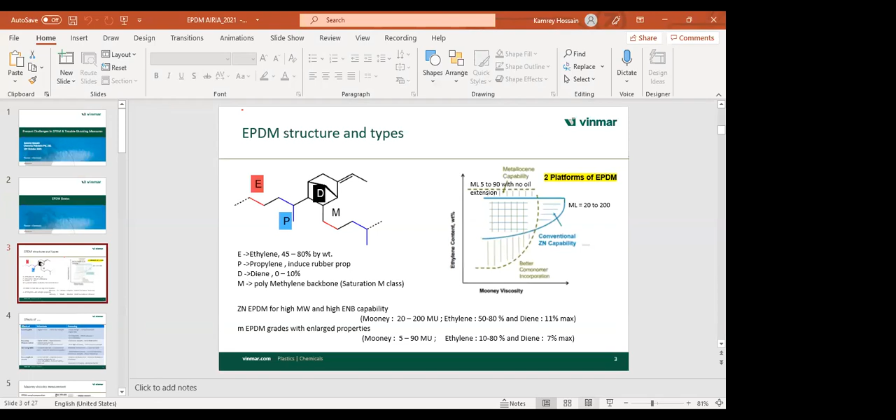Okay, now you can see the slides. Yeah, it's now coming, second slide is coming. So sorry, again I'll repeat. So my mistake, Vaibhav, you sit here. Yeah, sorry, so sorry, so let me start from the first again. Sorry, my apology.

So here I am showing about the EPDM structure and types of EPDM. If you see the EPDM structure, EPDM consists of ethylene, propylene, and diene. M stands for the saturation M class rubber, so M means polymethylene or methylene.

There are two platforms for making EPDM rubber. One is Ziegler-Natta catalyst system, another is metallocene capability. Mostly in the world, EPDM is manufactured using solution polymerization technology. Only Versalis is making EPDM through slurry mechanism technology, and Arlanxeo has one plant for the slurry technology. Arlanxeo also uses their own innovation technology that is called ACE. The rest of all the plants in the world are either using Ziegler-Natta or metallocene.

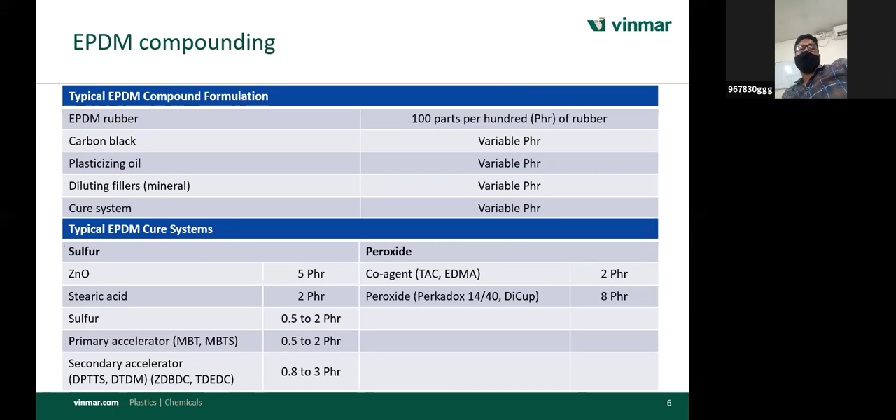This is the typical EPDM compounding. EPDM rubber, we take 100 parts, carbon blacks at variable PHR, plasticizing oil, diluting fillers mainly calcium carbonate and clay, and cure systems. There are two types of cure systems we use in EPDM — one is sulfur and another is peroxide.

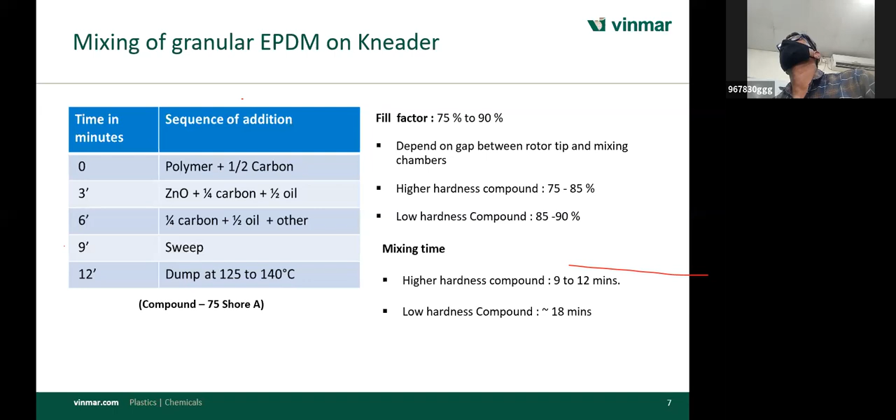Lot of noise is coming. I think somebody — can you please mute? All are requested to keep themselves on mute mode, please.

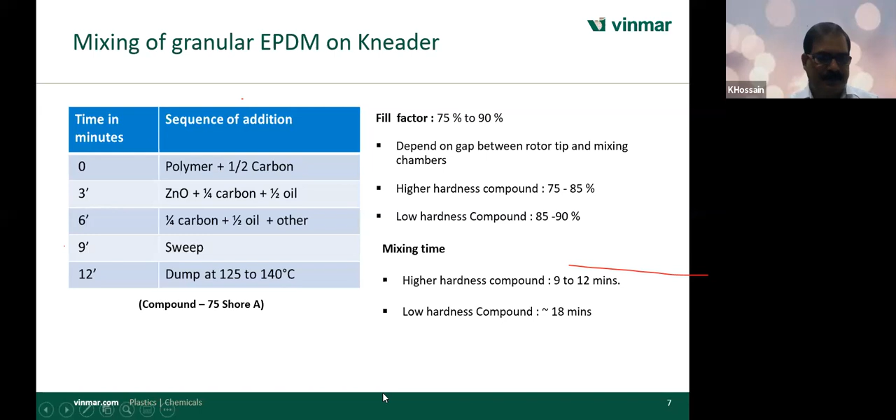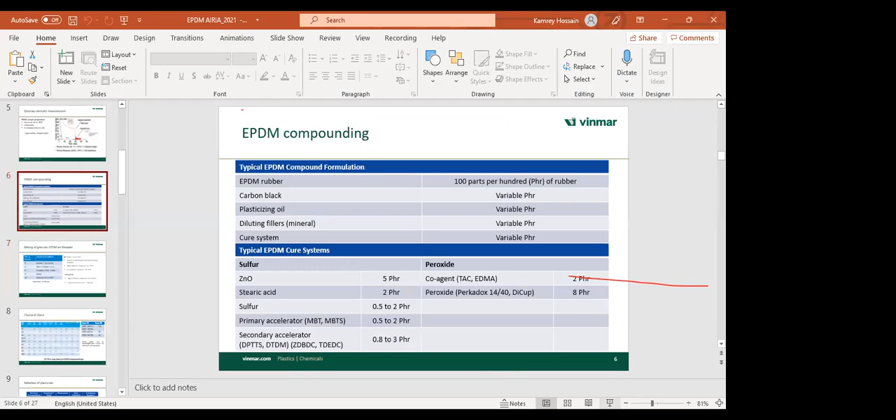Yes. Yes. Yeah, Mr. Dev.

So any questions on this slide?

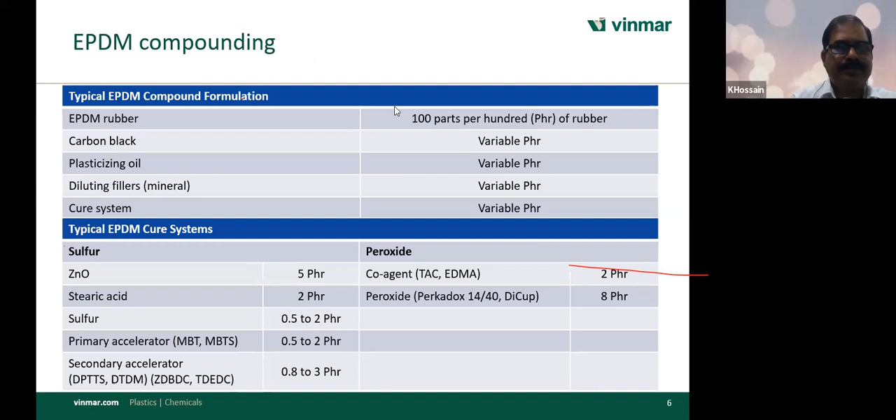I wanted the solubility limits basically for different accelerators. I think some of them are available this way.

Excuse me, I think we should finish up this presentation and you can do question and answers later on.

So please continue, no issues.

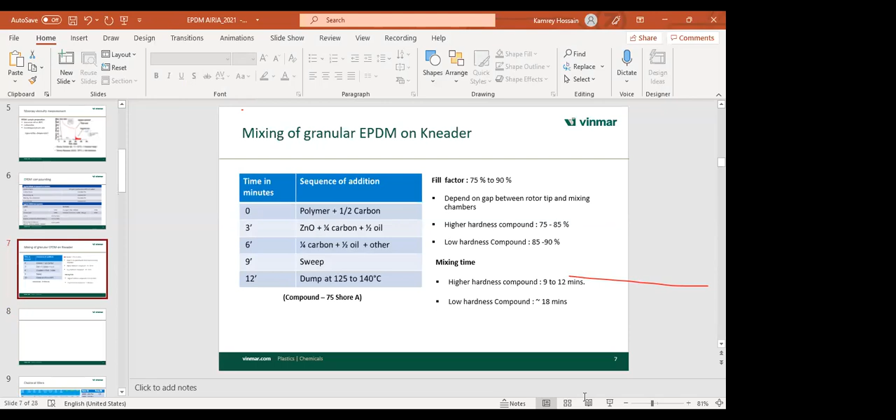You're on mute, we cannot hear you. Yeah.

It depends — the fill factor of the mixing of any synthetic rubber is important in case of a kneader. It depends on the gap between the rotor tip and mixing chamber. So if your kneader rotor is old, please take care of the loading.

Generally, the lower the hardness, you have to fill more. If the hardness is high, then the fill factor is less.

Again, mixing time depends — there is no standard mixing time for kneader mixing. It depends on the hardness of the compound. For high hardness, usually 9 to 12 minutes.

But for the low hardness, we recommend to mix...

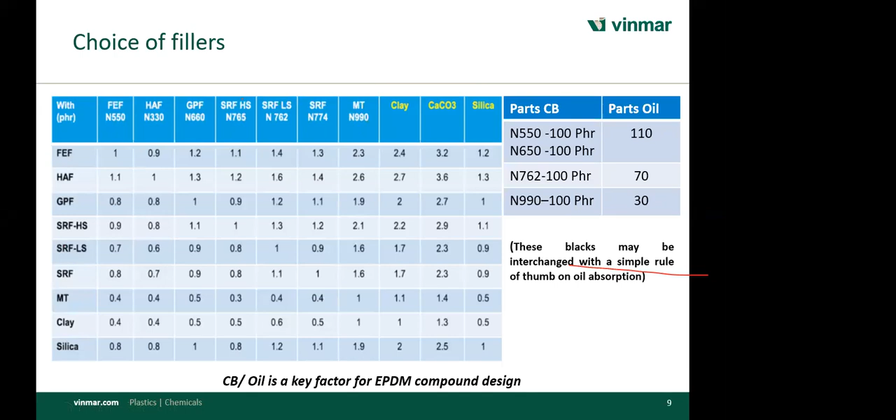Similarly, for SRF grade, we recommend 70 PHR, and for MT black, we recommend 30 PHR. So an important factor for the design of a compound is the carbon black versus oil ratio. That is a very, very important factor that I'll discuss in detail later on.

But if you go for high heat resistance and peroxide cure, then paraffinic oil is recommended. In paraffinic oil, there is low volatility. And if you go for the high temperature range, then we recommend high viscosity paraffinic oil. For higher service temperature, we recommend polymeric plasticizer, which is an ester type, like sebacic acid or soybean oil.

Now I'll discuss a little bit on the cure packs. In EPDM, we recommend conventional, semi-EV, and efficient vulcanization systems. The dose of sulfur is very important. In the conventional system, sulfur is 1.5 to 2.0, whereas in semi-EV it's 0.5 to 1, and in the EV system, maximum 0.5 PHR of sulfur.

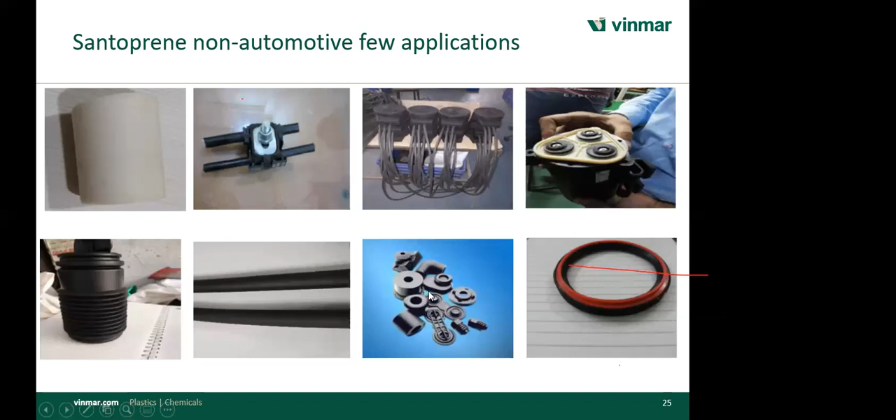A lot of synthetic rubber here. This is the CNG hose, fire hose. Earlier people used synthetic rubber; now it has converted to Santoprene. This is used for a lot of grommets, any type of things. And this is the SWR ring.

So this is all I wanted to share with you. I know a lot of questions may arise, so whatever knowledge I have, I can answer you. Otherwise, this forum has a lot of expertise; they can answer you, or later on we'll address it in a proper manner. Thank you all for your patience and listening.

Mr. Kamble, thank you for the presentation. And my name is Farooq. I have one question. After the product is finished, sometimes we find some rainbow effect on the surface, on the sheet. What could be the possible cause? That probably is blooming. It's a type of bleed. Oil is bleeding probably.

So what could be the possible cure for that if the oil is bleeding to the surface? If you can increase your PEG level. Polyethylene glycol is very good. Even in some cases sulfur blooms. We recommend first increasing polyethylene glycol, 2000 to 4000 molecular weight, at 2 to 3 phr. If your compound is more loaded, you need more phr; if less loaded, you need less phr. If that doesn't work, add some TDQ or TMQ, maximum 1 phr. TDQ or TMQ is a normal antioxidant; they prevent these type of chemicals from coming out of the surface. They form a complex and bind it inside the surface. And third, if the problem still remains, you go for insoluble sulfur, which is costly.

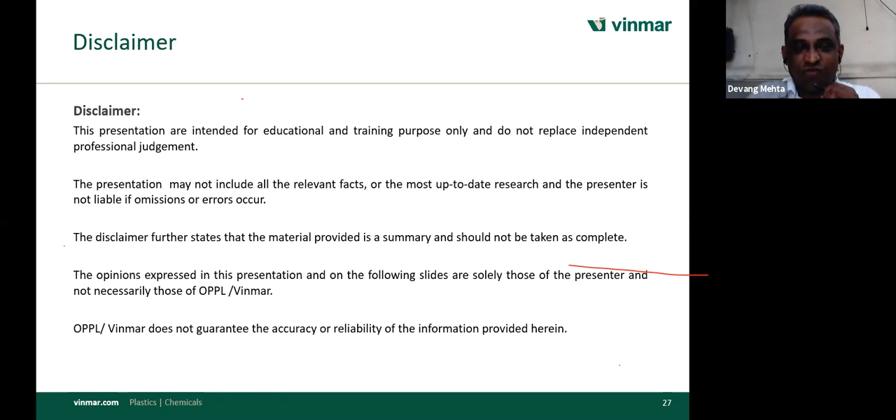Thank you. Sir, am I audible? Yes, Devang. Sir, we have three questions. First, in type B, you have mentioned calcium oxide dosage as high as 4 phr. In normal formulation, it is 1 to 3 phr. So why so high a dose? Second question was compared with TPR and EPDM, can we load more fillers in TPR and submit it? That was my second question.

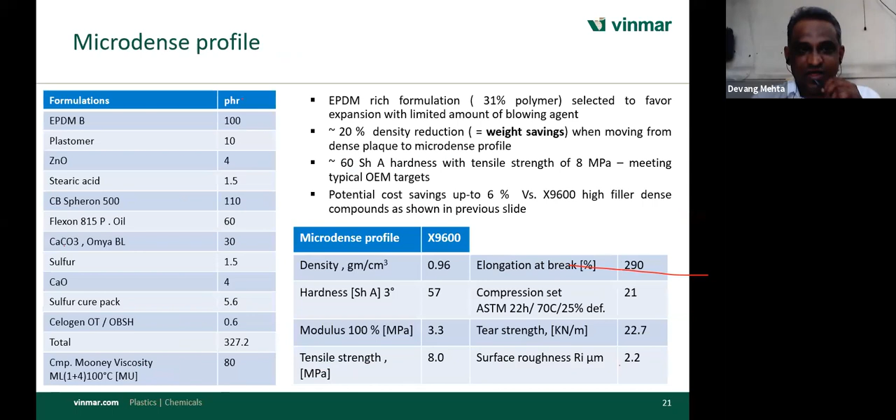Yes. So can you repeat your first question? I'll go to that slide. Sir, in type B, you have given a calcium oxide dose of 4 phr. Previous one, sir, Type B.

Okay, yes sir, this slide.

Why so high dose of calcium oxide? This is for the microwave curing system. In microwave, that is pressureless curing, we recommend high doses of calcium oxide. If pressure is there, like normal molding, compression or injection molding, you don't need to use calcium oxide.

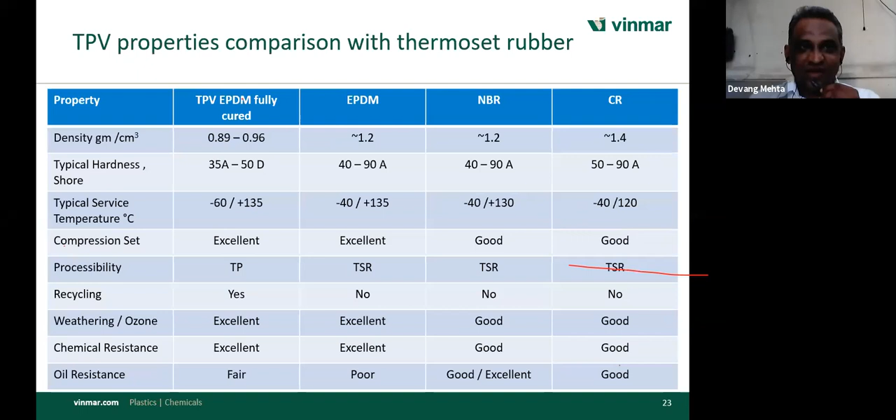My second question was about filler loading in TPR, can you highlight on it? No sir, you cannot add any filler with TPV, nothing. As far as I know TPV, I cannot comment on TPR. I don't have any knowledge on TPR or TPE, but Santoprene, you cannot tamper.

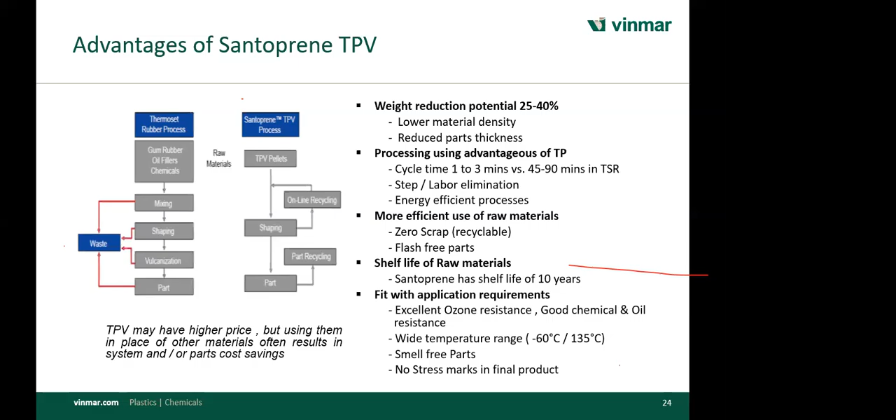Next question: how to increase the tear strength of EPDM compound? You have to reduce your mineral fillers. Still, if not getting satisfactory result, go for high molecular weight EPDM. Going back to my first slide, if you switch over to the Ziegler-Natta system of EPDM, like oil extended EPDM, you will get excellent tear. So if your molecule is high, then you cannot break it down.

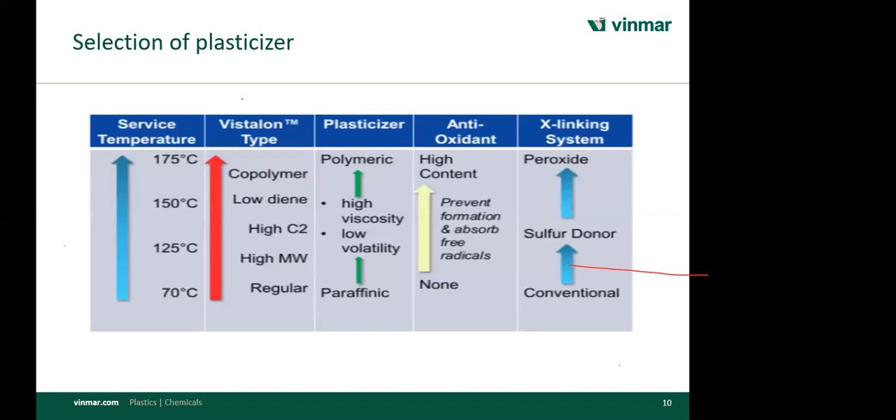or EV system. If you want to move on, again 175 degree centigrade, your product is going to sustain for long term duration in use, then you have to choose the peroxide system. And in peroxide, please remember, don't use HVA2, since most cases I found people mixing up. Once you buy peroxide, they buy coagent, even though in some cases the coagent price is higher, so from the other side the push is more - before peroxide comes, they buy the coagent. But don't use HVA2 with peroxide system, since exclusion of oxygen from the system is practically impossible, except salt bath curing system.

How can we avoid blooming issue in EPDM components? Ma'am, already I discussed blooming. Please add PEG 2 to 3 pHR maximum, depends on your filler loading - if filler loading is more, add more PEG. Second, you can add TMQ or TDQ 0.5 to 1 pHR. Still, if you get some problems, go for insoluble sulfur.

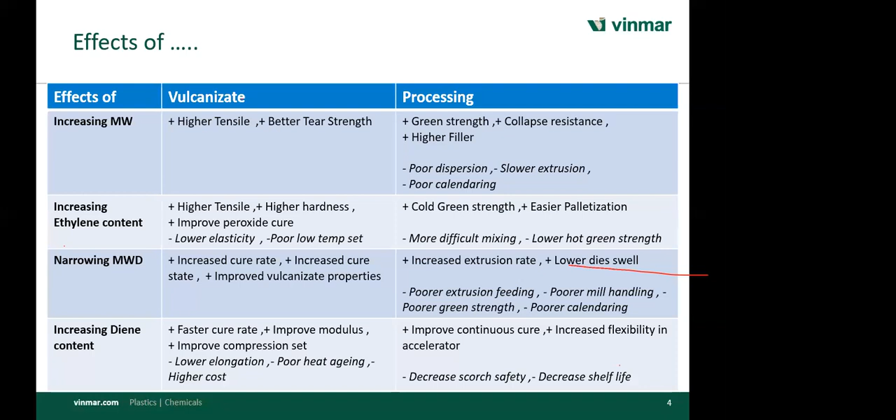How can we improve green tack in EPDM compound? Let's go to my slide. If you're talking about green strength or green tack - tack, see, EPDM, if you want more tacky EPDM, you have to go for more propylene content EPDM, you have to change your polymer, select the correct polymer. This propylene induces the rubber property, and this rubber property, rubber is tacky - if you take natural rubber, you find it tacky. So the other component is ethylene, it's not giving you the tack, it gives the strength only. So you select the polymer where the propylene content is higher.

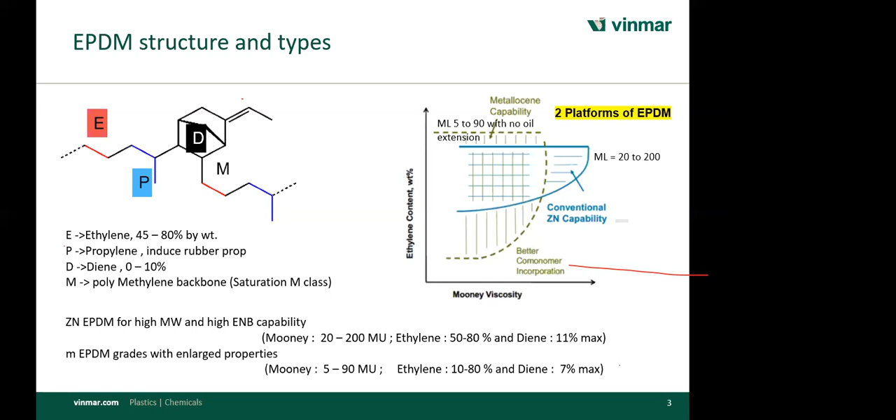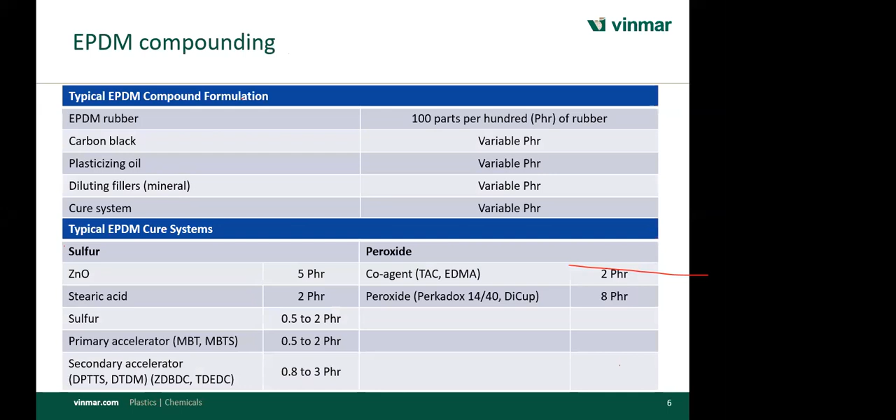Our next question is how to select specific peroxide coagent. Very difficult to answer until one can understand your systems, how you are doing the curing system with peroxide. Usually we recommend dry steam, and for dry steam we recommend a trap - one trap should be installed before it enters your vulcanizer, and that trap functions as the entrapment of moisture and air. Another thing, some people do a lot of coverage, meaning direct steam is not coming to the profiles, that sort of thing. According to that, we recommend some combination.

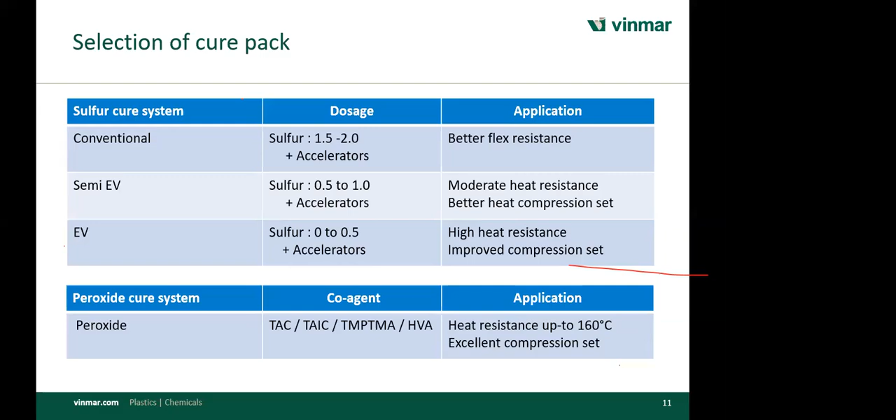How to get rid of unpleasant smell from EPDM curing process? Rubber will give you smell, man. If you are using peroxide, then you will get more smell.

And how to avoid bubbles issue while molding in lower hardness compound?

Bubble means your polymer, your compound Mooney is coming low. That's why the bubble is coming. So you have to reduce the oil.

Few things I can share from my experience in other parts of the world. I visited Europe and extensively worked with them, and I asked them about their technologists. They don't have any. Whereas in India, I think every rubber industry has at least one technologist, and some have a few. So we are very fortunate.

They say, in our country nobody knows rubber, so who is handling it? I am a mechanical engineer, or I have a BCom, or a degree in fine arts, and yet they are fantastically handling it. I asked, if a problem comes, what do you do? They said, comrade, it's very simple—either increase oil or decrease oil. Believe me, that's the only technology. If your bubble is coming, it means your Mooney is less. Please reduce the oil in your compound. Nothing to worry, just reduce it and you'll get it.

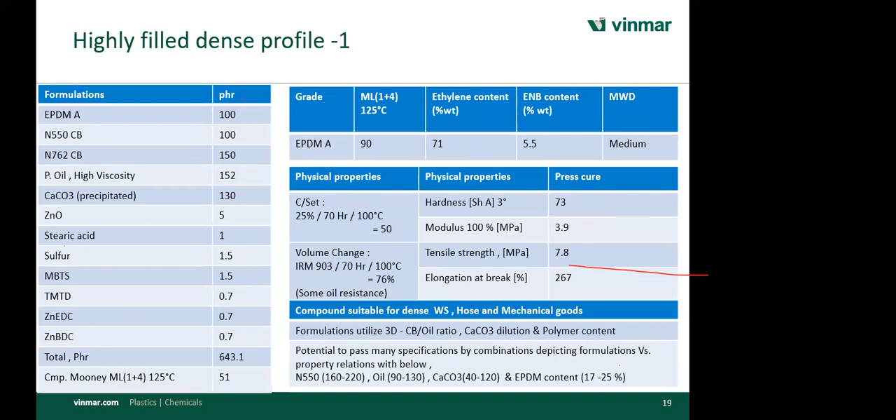How to join two cured ends of an EPDM profile? Joint of the two EPDM profile ends—yes, that you can do by the transfer molding method. It's like a semi-injection transfer molding method. There, you have to rough the surface of the cured profile to make it fresh, put some sort of adhesive like rubber solution, and insert some compound in between. It acts as the joint connector.

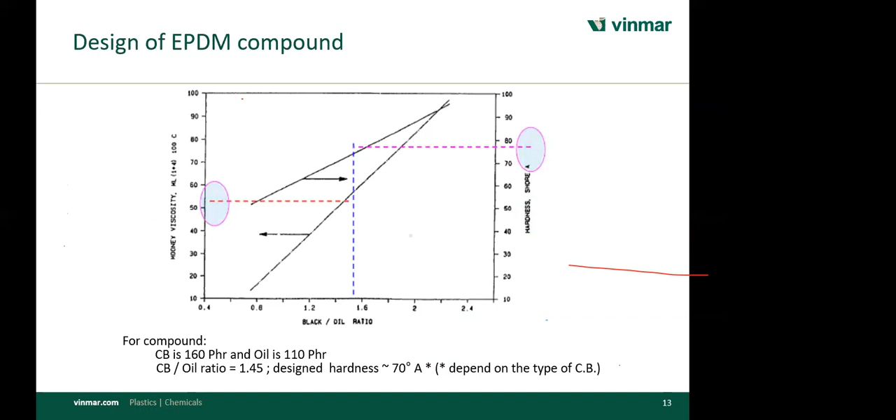How can we identify whether EPDM is sulfur cured or peroxide cured? You can burn it—if sulfur is there, you get black soot. In peroxide cure, there is a carbon-carbon chain, so you get carbon dioxide and no black soot comes. With sulfur, you also get a smell—if you burn it, you get a matchstick-like smell of sulfur.

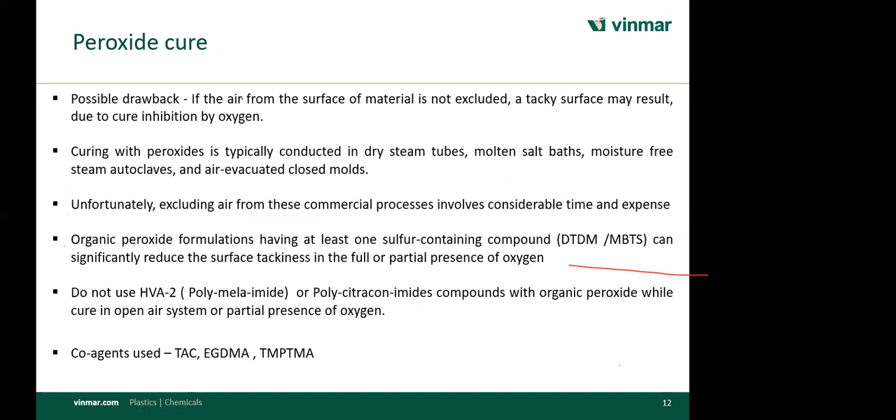Can we avoid blooming by post curing the product? For EPDM we don't recommend it. Silicone people do that.

Question on 1,2-polybutadiene: is it also used as a co-agent in peroxide curing with EPDM? Yes, in some cases. How much dosage is required? About 1 to 2 phr in some applications. Do they also require TAIC along with 1,2-polybutadiene? No, it is not required.

There are a lot of patents on this. If you Google it, you will find very good applications of 1,2-polybutadiene as a co-curing agent—very specific applications.

How to avoid blackness of gasket during abrasion test? I don't have any answer for that, ma'am, really I don't.

How to improve shining in EPDM products and get rid of EPDM stickiness to the mold? For shining, if you want to increase it on any EPDM, you can increase the calcium carbonate a little. Calcium carbonate always gives shining to your property. Even if your surface is dull, just add calcium carbonate, 10 to 20 phr, and it will give you a shiny surface.

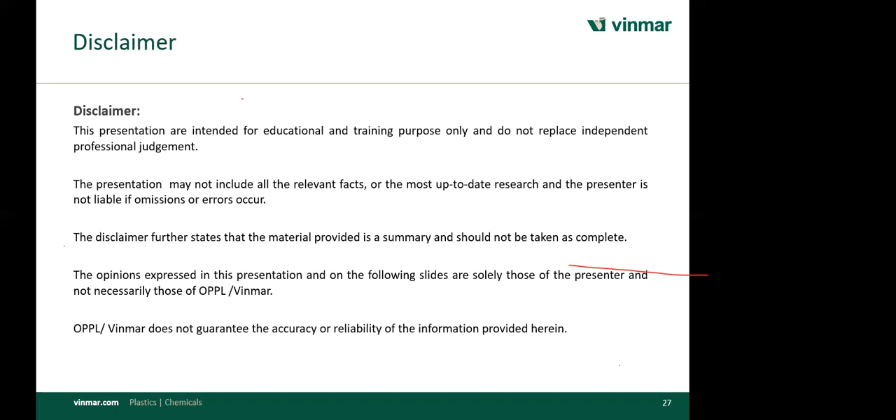Hello. Which grade to use for sponge dense material? That was the one grade for that. I'll show you that grade. One second.

Sir, you have not specified where to select oil extended or non-oil extended. How to select between these two?

Again, see, if you use oil, as I said, the availability of Ziegler-Natta is going to be a constraint in future, since all the new plants will come with metallocene. And all the producers are looking to make money. In metallocene, they produce 100% of their plant capacity. In Ziegler-Natta, they can achieve maximum 70 to 80%. And that's how all this trade-off is happening. Although the capacity has been added in the last 5 years, still, if you find the prices soaring up, supplier is telling, I don't have the EPDM to offer.

So it is better to shift. You will get all sort of properties. Instead of oil extended, you can go for the non-oil extended. If you are using oil extended, that means you are sacrificing polymer with respect to the oil buying. There you must go for high filler loading, since all oil extended polymer has very high molecular weight. That's how you have to balance.

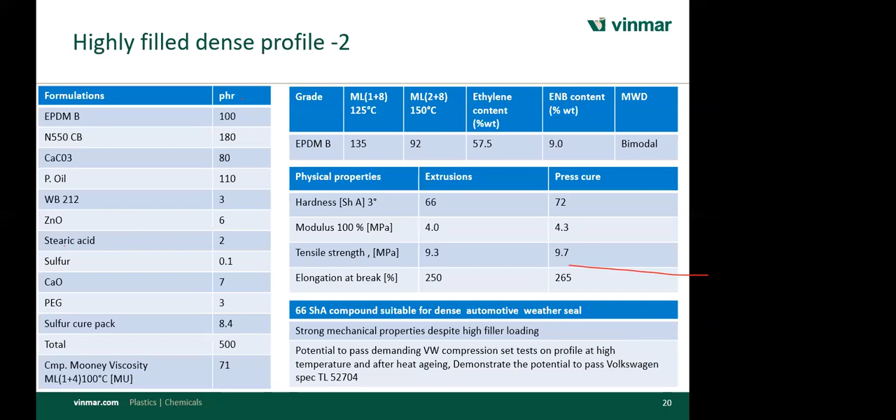The key topics discussed and the in-depth knowledge that you shared with us will surely help all the members who attended the webinar. I hope this information is of help to everybody. Thank you very much.